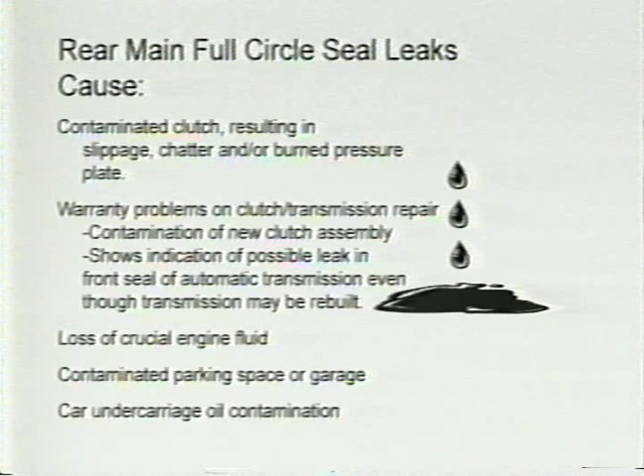Install properly the new quality full circle rear main seal on the new seal surface and rear main seal leaks are eliminated. Rear main full circle seal leaks cause contaminated clutch resulting in slippage, chatter, and/or burned pressure plate, warranty problems on clutch transmission repair, contamination of new clutch assembly, and shows indication of possible leak in the front seal of the automatic transmission even though it may already be rebuilt. Other issues include loss of crucial engine fluid, contaminated parking space or garage, and car undercarriage oil contamination.

This vehicle has run 182,000 miles to test the crankshaft seal surface sleeve. At this time, the vehicle was beginning to show slight rear main seal leakage due to seal deterioration. The seal surface sleeve that was removed showed little wear in the seal contact area.

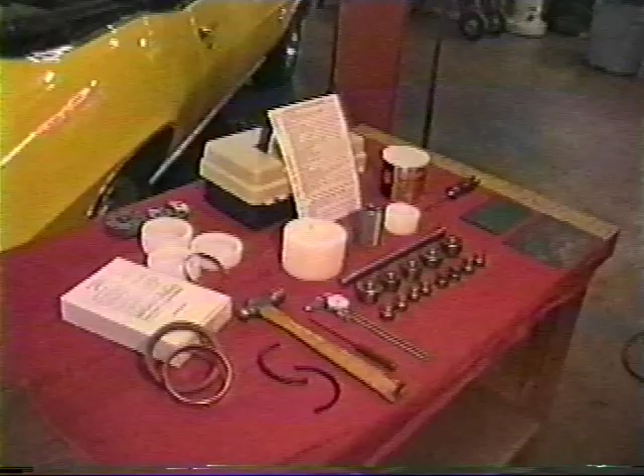Shown are the tools, equipment, and supplies required to repair full circle rear main seal leaks by installing a seal surface sleeve and new full circle seal. Crankshaft tool: the 301 Universal Installation Tool is used for most applications.

Three-cup tools for the flange seal surface sleeve for recessed flywheels of the Japanese design. See the application sheet for proper installation cups. The application sheet also indicates alignment buttons for different applications, and the proper sleeve and seal kit to fit your application.

In this demonstration, we're repairing a 350 Chevrolet with an automatic transmission, using accurate calipers to measure the outside diameter of the crankshaft tail flange. On this 350 Chevrolet, we installed a seal surface sleeve when the vehicle was new and it has now run over 182,000 miles. We will remove this seal surface sleeve for demonstration purposes only.

Use an ice pick type tool and small hammer to remove all the old seal surface sleeve if one is already installed on your engine. Use emery cloth to clean any burrs on the OE tail flange seal surface left by the seal removal tool. Use medium duty grease for new seal and sleeve lubrication, and a screwdriver for the removal of the old seal.

Assembly of the 301 tool is accomplished by taking the 3/4 inch threaded rod, sliding the slide hammer onto the rod, sliding the proper backing plate onto the rod with the recess toward the engine. Note relief holes for the tail flange alignment pins on some applications. Screw on the proper pilot hole alignment button.

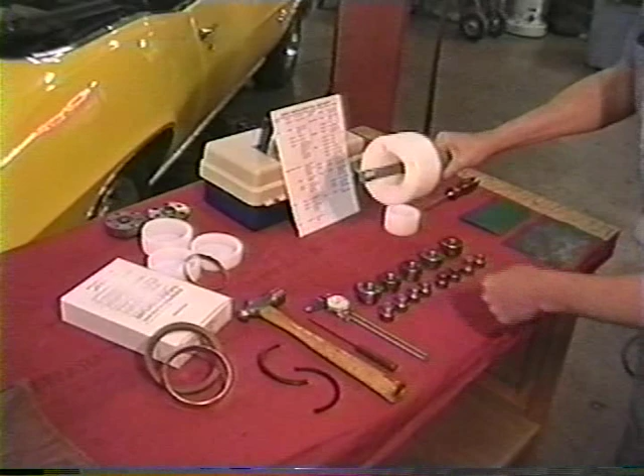For this demonstration, it is the number 1 button for the 350 Chevrolet. Screw the alignment button on the length of the thread rod area. Set aside the tool for use when installing the seal surface sleeve.

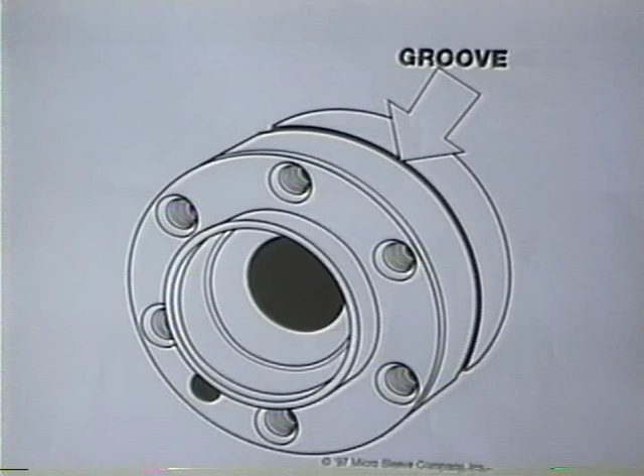Rear main full circle seal leaks cannot be fixed by just replacing the seal. There will be a groove worn into the seal surface of the crankshaft flange. A crankshaft seal surface sleeve will cover the groove with a new, longer wearing seal surface. During the normal course of use, the seal will wear a groove in the crankshaft flange.

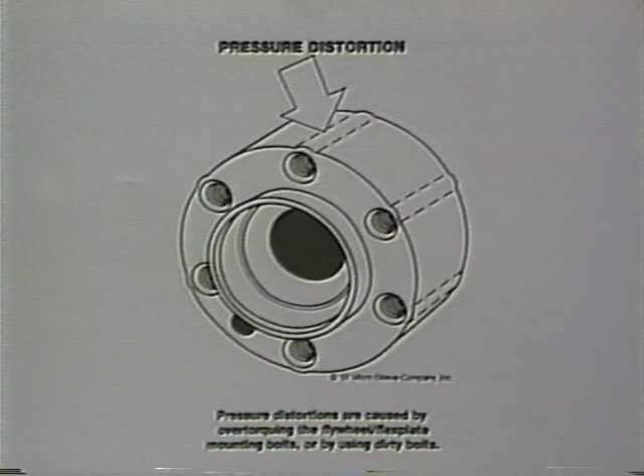Pressure distortion is caused by over-torquing the flywheel flex plate mounting bolts, using an air impact instead of a torque wrench, or reusing dirty bolts. Uneven seal surfaces will negate the seal's ability to do its job. Cracks above the mounting bolt holes can also be caused by the extreme stress of over-torquing the flywheel flex plate mounting bolts. The uneven, ragged, cracked area will destroy the seal.

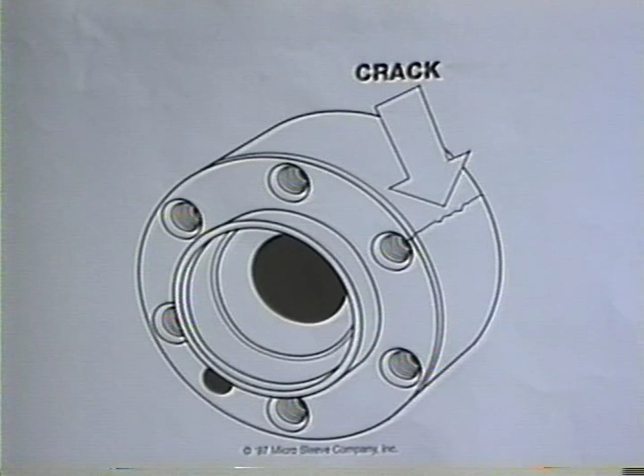A crankshaft seal surface sleeve will reduce all these problems to within the seal's working parameters, or it may totally negate these problems. A seal surface sleeve is the key component in full round rear main seal repair.

If the rear main seal is an older style 2-piece seal, little can be done if a groove is worn in the crankshaft flange. If there is a groove, it will probably be very light. Replace the 2-piece seal with a quality seal, following the seal manufacturer's installation instructions closely. Use only quality seals. If the engine has been remanufactured and is equipped with the full round seal, it is imperative to check the tail flange outside diameter.

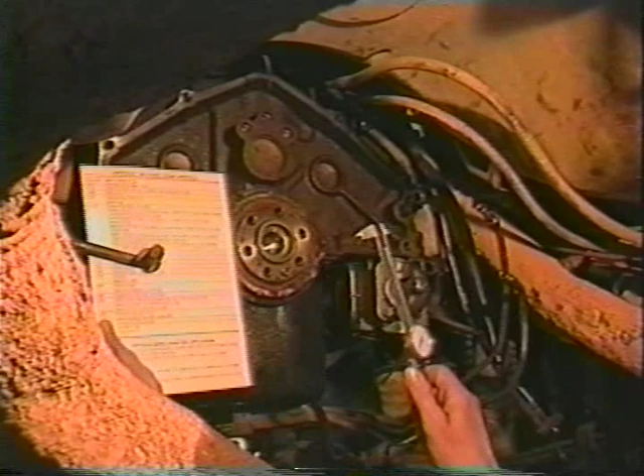Crankshaft tail flange OE sizes are enclosed on the application sheet furnished in the Crankshaft 301 installation tool package. Use accurate calipers and measure the tail flange outside diameter. If tail flange measurements are 5 thousandths under the application-listed measurements, the tail flange outside diameter is marginal to press fit a crankshaft seal surface sleeve.

Use a sleeve at your own risk. The crankshaft tail flange will be smaller than OE listed tolerance if the engine has been rebuilt without properly installing on the crankshaft tail flange a new crankshaft seal surface sleeve.

Some engine rebuilders touch the crankshaft tail flange and grind polish 5 thousandths of material off to try and remove the seal surface wear groove. This is not a proper solution and is very likely why there is seal leakage. The only temporary fix in this situation is installing a new seal correctly.

If the crankshaft tail flange is approximately 25 to 27 thousandths larger than original equipment listing, that indicates that a crankshaft seal surface sleeve has already been installed. If there is a crankshaft seal surface sleeve already installed, you can feel the edge of the sleeve at the outer corner of the tail flange.

This installation has a seal surface sleeve that is to be removed. Caution: remove the old seal surface sleeve only if the crankshaft tail flange is 25 thousandths over standard tail flange diameter. Some engine rebuilders grind down the crankshaft tail flange and install a crankshaft seal surface sleeve to bring the tail flange back to factory outside diameter dimensions.

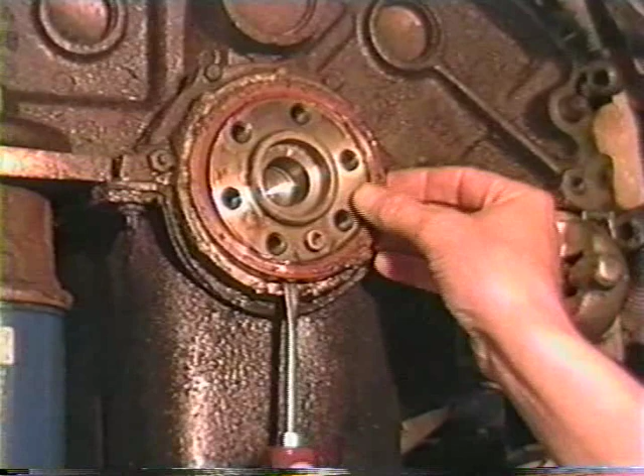On the older engine style, aluminum seal blocks are in some General Motors engines. There are 3 small tabs at 120 degrees around the housing. Remove these tabs by simply breaking them off. This engine has no tabs in the aluminum seal block.

Remove the existing seal surface sleeve. An ice pick type tool is ideal for sleeve removal by driving it under the sleeve edge. The existence of a previously installed seal surface sleeve is a rare occurrence but must be addressed.

It is imperative to remove any burrs left by the seal surface sleeve removal tool. Clean thoroughly the seal cavity and remove any dirt and any burr material. Check smoothness of crankshaft tail flange outside diameter.

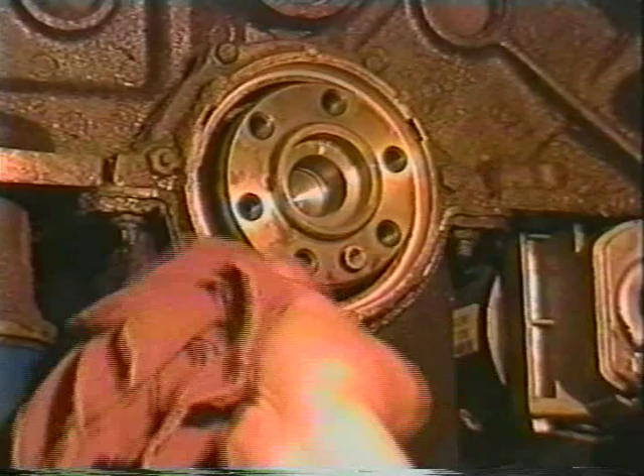Installation tool buttons are designed to fit the pilot bearing recess with the pilot bearing removed. Remember to have the proper alignment button as listed in the application sheet. Align new seal surface sleeve carefully.

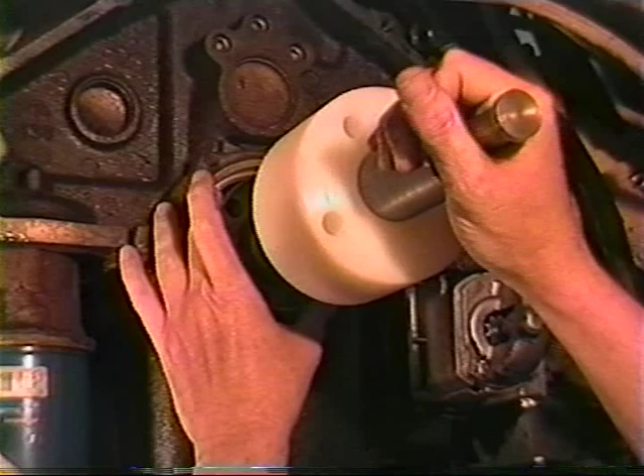Insert alignment buttons on assembled 301 tool into pilot bearing hole. Move backing plate with firm pressure to hold seal surface sleeve into place. Rotate backing plate to align recess holes with tail flange alignment pins. Gently tap seal surface sleeve onto tail flange.

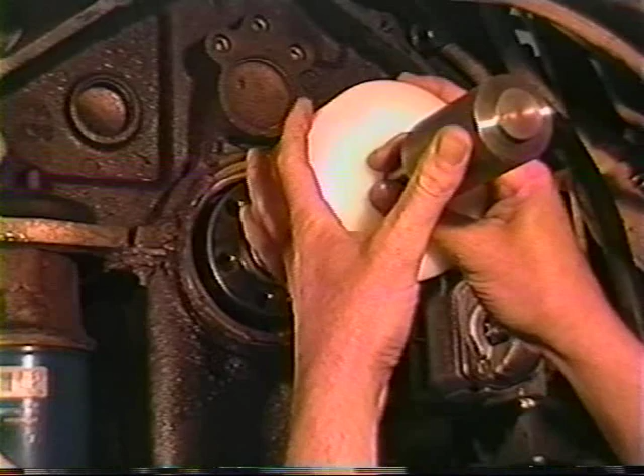It is imperative that the seal surface sleeve is going on the tail flange square. Tap the seal surface sleeve onto the tail flange and give 2 or 3 forceful raps until the seal surface sleeve is seated correctly, then remove the tool. It is important that the proper seal surface sleeve installation tool be used for the application being resurfaced.

Proper tooling is listed in the rear main seal catalog. Check the outside diameter of the seal surface sleeve to make sure it is seated properly. Lubricate 360 degrees of new crankshaft tail flange seal surface.

Lubricate 360 degrees of new seal wet lip. Install new full circle seal. The seal spring is to face toward the engine. The seal is to be square with the rotating mass, the crankshaft tail flange. Follow the seal manufacturer's seal installation procedures.

Note: take care not to damage any rubber portion of the full circle seal. A light scratch on the oil seal wet lip will cause leakage. The flat rear portion of the crankshaft is the proper reference point to square the seal to the rotating crankshaft flange.

Exact uniform 360-degree measurement of the seal metal housing to the face of the crankshaft flange will indicate a perfectly positioned full circle seal.

Note: driving the full circle seal to bottom out in the seal cavity will not always square the seal to the rotating mass. Remember, the back side of the tail flange is the reference point for seal straightness. Install new pilot bearing and proceed with clutch installation.